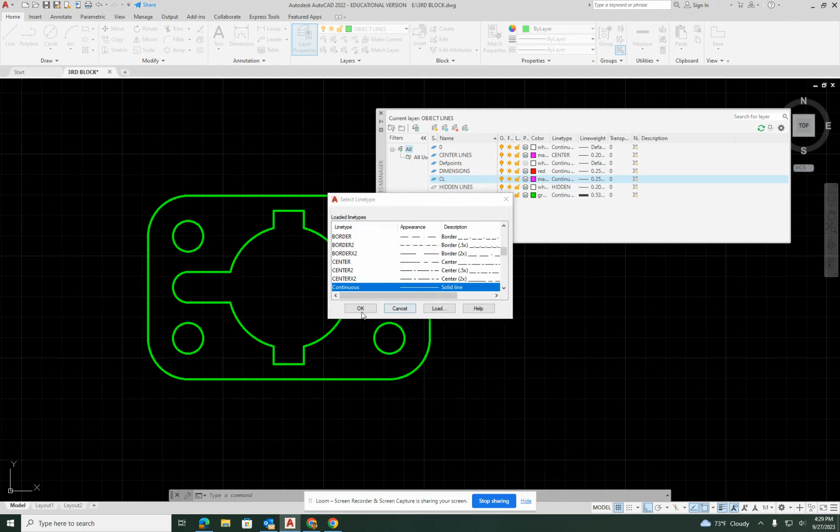And then for the line type, I'm going to load it. Since you don't have any on yours, you'll have to click on load, and then you'll scroll down to center. You'll hit OK. And since I already have one here, it's going to just ask me, do I want to reload it? But yours is not going to do that. And you'll hit OK. So you'll basically repeat those steps with the hidden and also with the object line. All right.

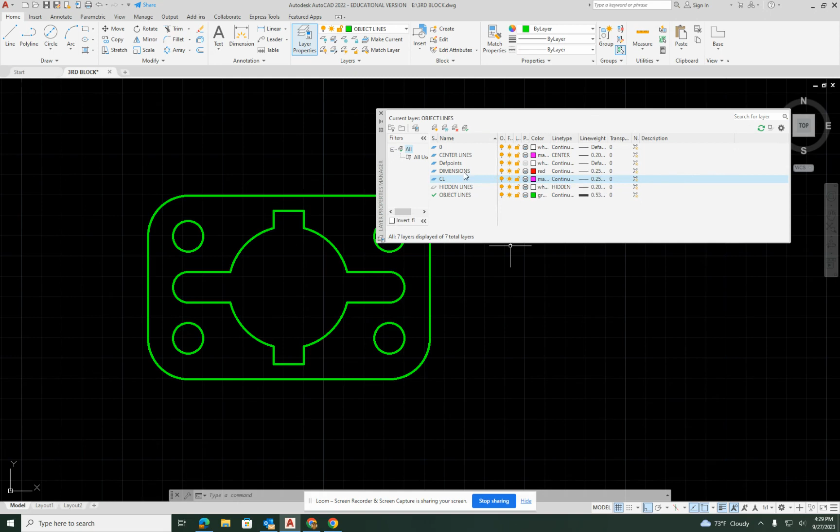So the object line, when you come over to this category here on the line weight, the object lines are 0.53, the hidden lines are 0.20, and the center lines are 0.25. So then that gives you everything. So once you set those, then you have the ability to go back and forth between them here. So every time you click on something here, your properties will change.

So all three of these should always say by layer: by layer for the color, by layer for the line type, and by layer for the line weight. So those three will always be associated with this. If you change one of these manually, let's say for instance you do this and then you keep doing stuff, it's going to stay on that until you change it back to by layer. So just always make sure that these three right here are associated with your layer, especially when it comes to the color. That's where a lot of the hang up is, that you get hung up on the colors, but then you forget to change anything back.

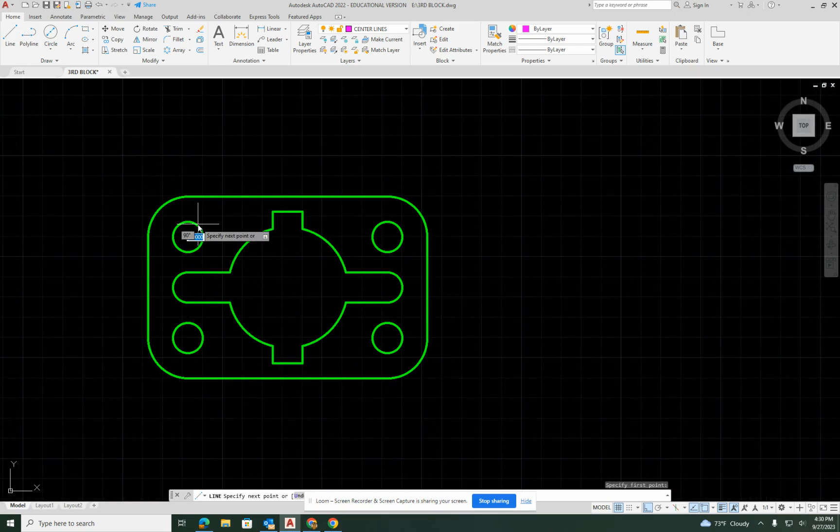All right, so I'm gonna do my center lines. And I'm gonna start with this one. And I'm just gonna kind of make it off to the side, like that. Then I'm gonna move it. So I'm gonna click on it, and then I'm gonna click on the center. Now, it is even on both sides.

So what I'm gonna do is actually build a mirror with it to get it going the other way, so it'll be the same. So I'm gonna click on mirror, select the object, hit the enter button, and I'm gonna pick the center. Now, I'm gonna turn my ortho off so I can see it rotating, and then I'm gonna hit the tab key and change that number that's in the right side to 45.

Now, don't trust that the machine is right on 45 because it'll round numbers up. It could be 44.50. So you want to make sure that you type it in manually. So you're going to type in 45, hit the enter button twice, and then it's going to stick.

Now, in most cases, your center lines are not going to show up too well. So what you have is what's called an LT scale to make sure they show up. So if you type in LTS, hit the enter button. Right now it's at 1. Let's go with 0.50 and see what it does. All right, so 0.50 looks like that's perfect. And it split the center line the way it's supposed to and put the plus right in the middle.

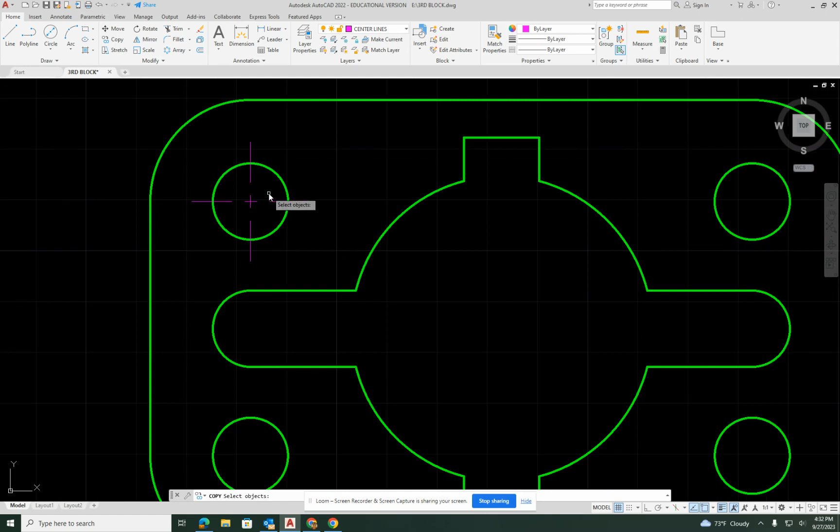So I'm not going to remake that all over again. I'm just going to copy it. And I'm going to copy it everywhere I need it. So I'm just going to hover around these center points until I got center points in the middle. And even the big one in the middle, I'm going to do that one also.

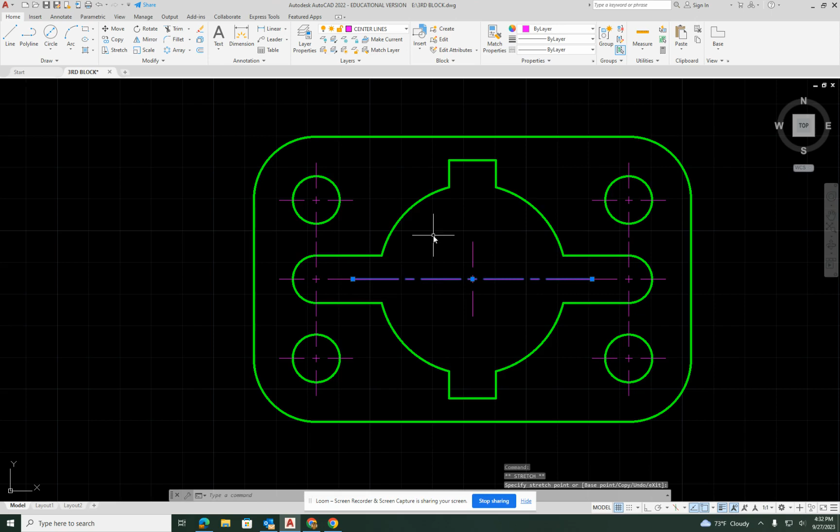Now, since that one is larger than the rest, what I'm going to do is just kind of take this and stretch it and touch the others. And the two that are purple here, I missed. I'm just going to take them and drag them up and down. Not all the way out the box.

And to make sure that it stays straight, you might want to turn your ortho back on, just to make sure it's not crooked. Okay, so that's all my center lines that I need. I'm going to switch over to my dimension layer. I purposely make mine red for a reason, because it stands out.

So for the dimensions, I'm going to do them pretty much like they are on the sheet, so I can find one. But I think that I did. I have to remember what I did, since I don't have a sheet over here. All right, so we'll just go for the gusto right here. I'm going to do a linear from this point to this one. So you always start with the interior dimensions first.

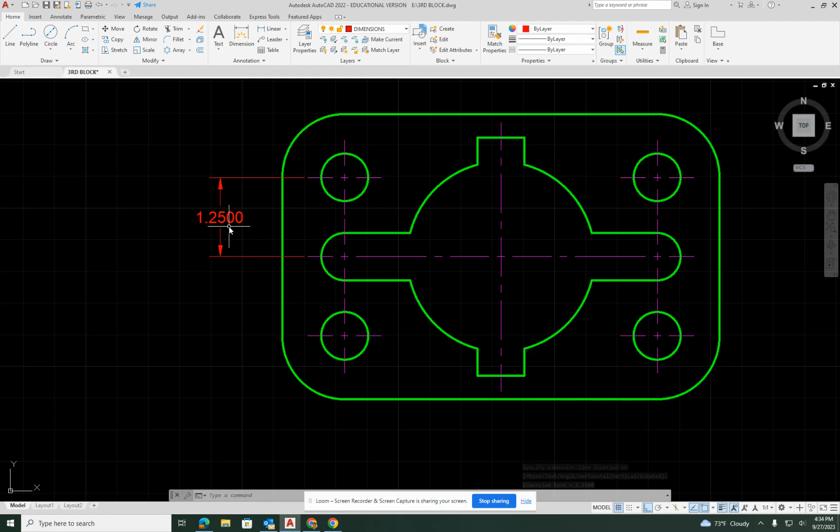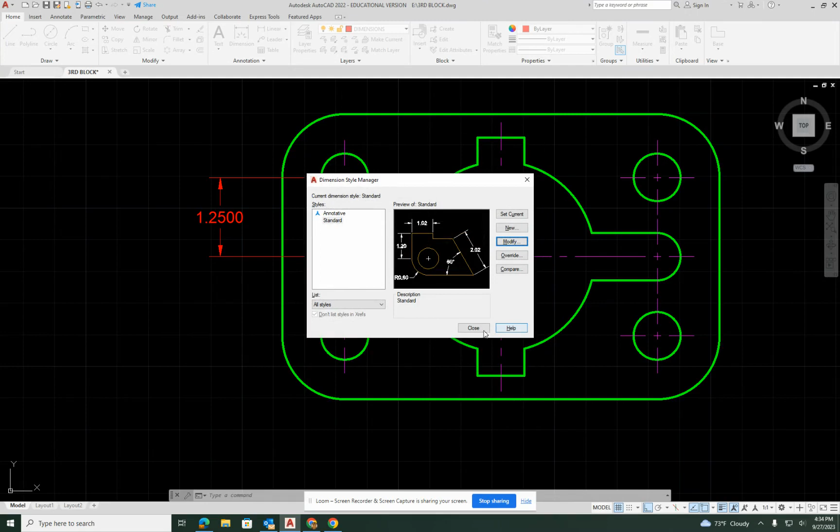All right, so you see that mine has 4 decimal places to it. We're going to change that. So we're going to type in dim style. And we're going to modify it. Now, the good thing is that once you make these setting changes, you don't have to go back and do it on every single assignment, because we're working on the same file. Once they're set, they're set. All right, and we're going to do set current. We're going to do close. It's going to change it.

So we're going to do that one. And we're going to do another one between these 2 points here. And we'll do the same thing across the bottom. So we're going to do one between this point. I'm going to drag this down. And we're going to do an overall between the 2 points.

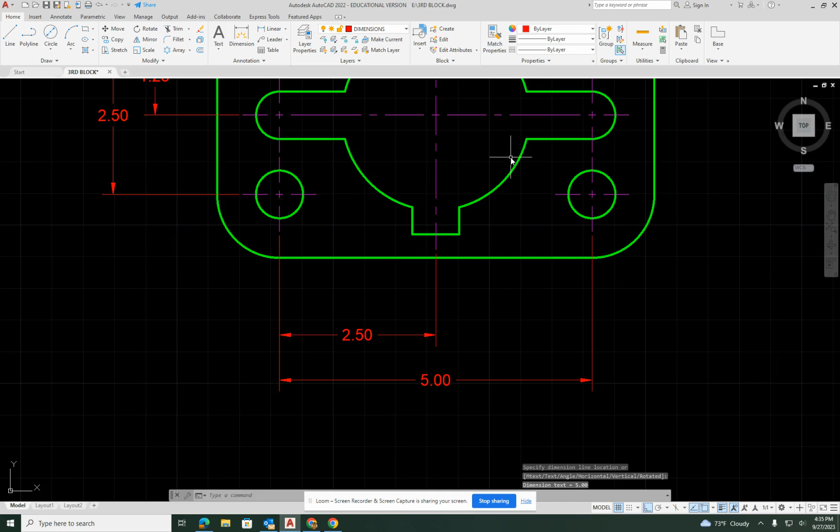So now, since we are, I'm going to pull that one out. I'm going to pull this one out. That's going to be another one that goes in the middle of that. That's why I'm pulling this one out so far. So this one is actually going to go between this point and right here.

Oh, you know what? We don't even need that. So we'll actually pull this in a little bit further, because we already got the same thing on the other side. So we don't need to repeat the same dimension twice. All right, but we will do the one from here to here, and we'll pull that one out.

And now from that, the only thing we really need are a couple diameter dimensions, which we'll do diameter for this hole here. And we're going to edit that dimension. So what you have to do is click behind the 5, hit the enter button, supposedly. Let me cancel that. There we go. And we're going to put 4 holes.

All right, then we're going to do this diameter. Now, it may not do diameter because it's only a curve. So what we're going to do is actually do a little trick with it. So we're going to do QL.

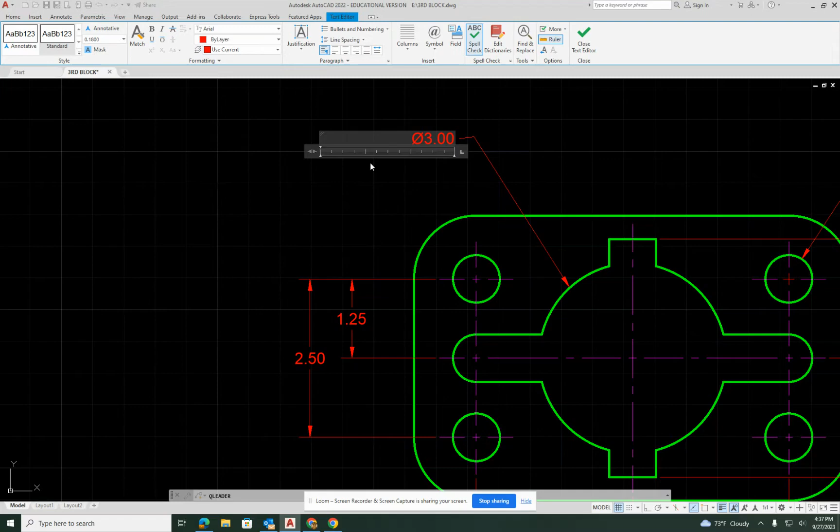So what we're gonna do is diameter 3. So we're gonna do 2% signs, lowercase c, 3.00, and then it's gonna give us a diameter for that. Otherwise, it's gonna do a radius if we did it the other way. So we're gonna straighten this out like so.

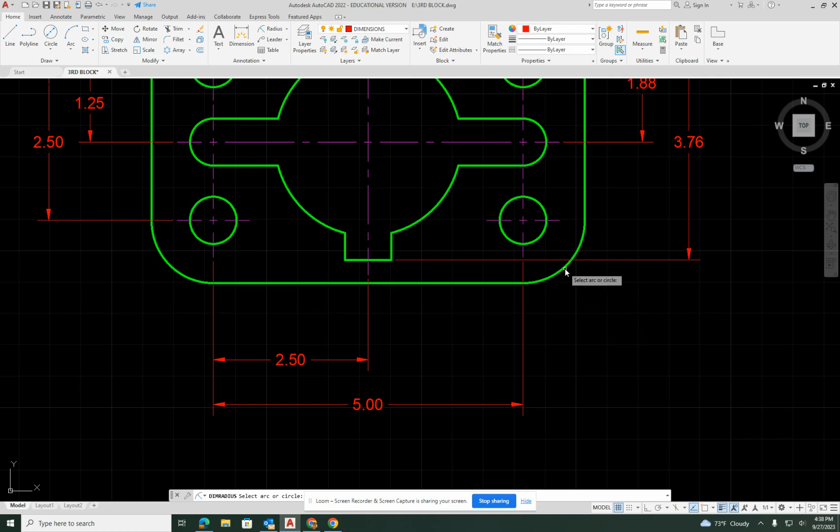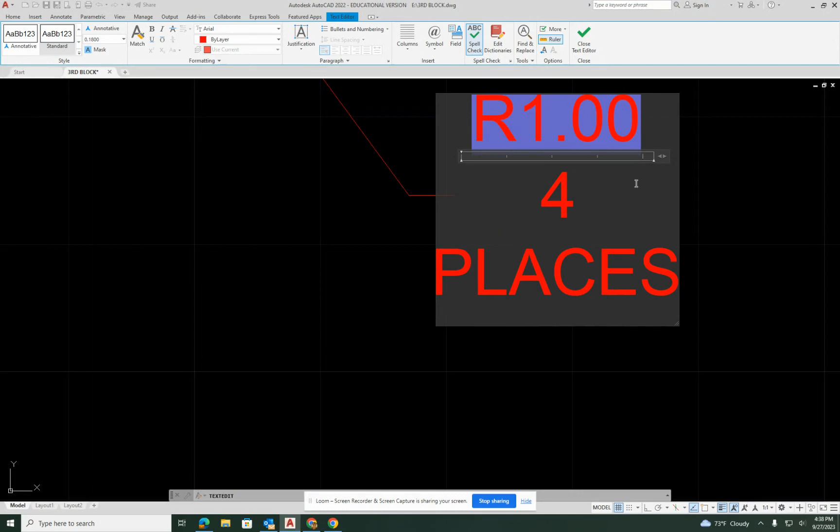All right, so I think the one thing that we do have left is, oh, we got our radius at the corners. So we're going to use a radius dimension for that. Oops, wrong one. And same thing. We'll double click. We'll go behind the number. We'll pull this out a little bit. Hit the enter button. So we'll just do 4 PL, 4 places.

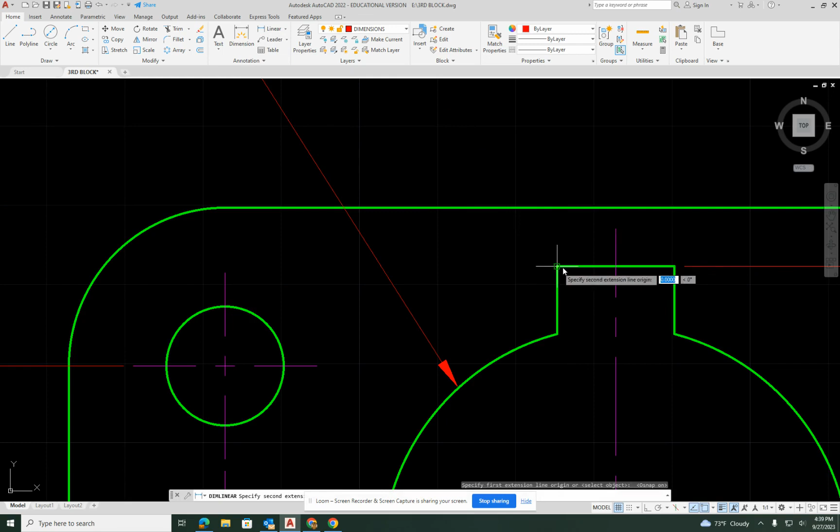And finally, we'll do our little key. And that'll be the last part of it. So we're going to do a linear. I'll turn this back on. We'll do 0.38 on that one. Then we'll do linear again. We'll do the 2 points here. So that'd be 0.75. We'll drag that up right there. So that's all the dimensions that you need.

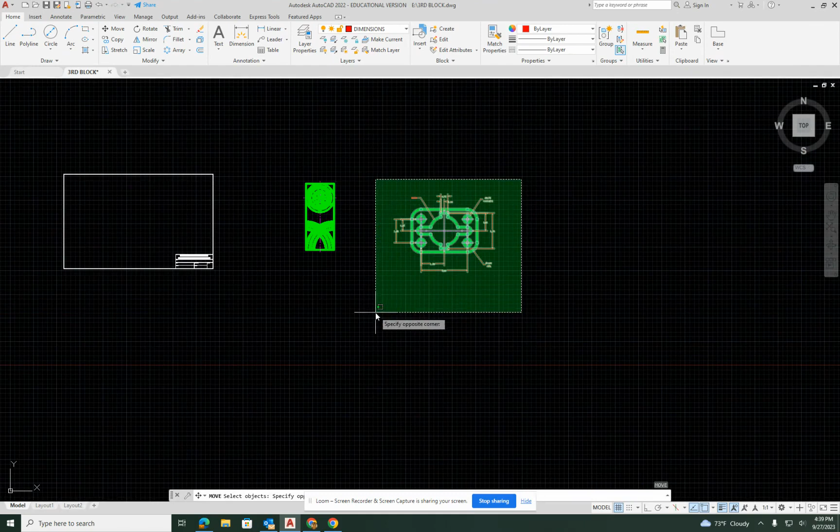All right, so now what you want to do is put a title block around this. Move this over here. Then I'm going to copy the title block and put it around the drawing. And we're going to try to center it. I kind of jump around. Sometimes it's good to move things when they're not touching anything else.

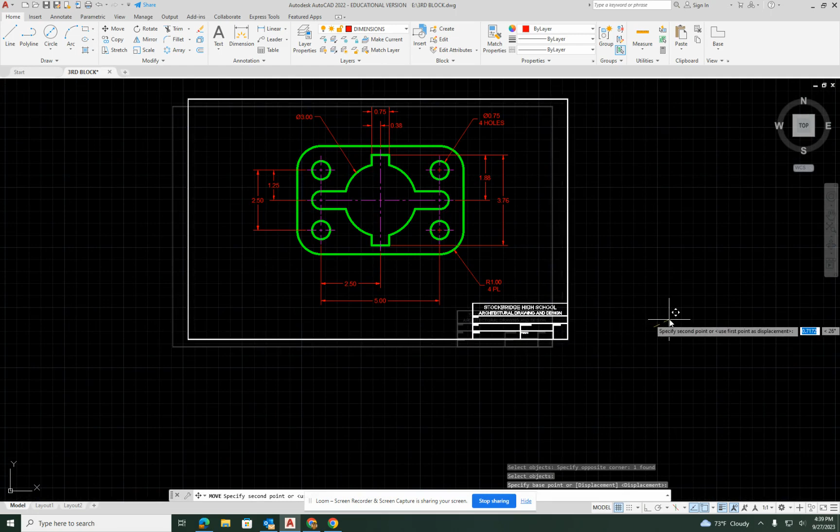All right, so now is our text. All right, so text, multi-line. We're going to go from top corner to bottom corner here. And I'm going to change my text height to 0.12. Then I'm going to choose the second, not the second, the third and the fifth button here. We'll just choose the third one, center. All right, so this is the key plate.

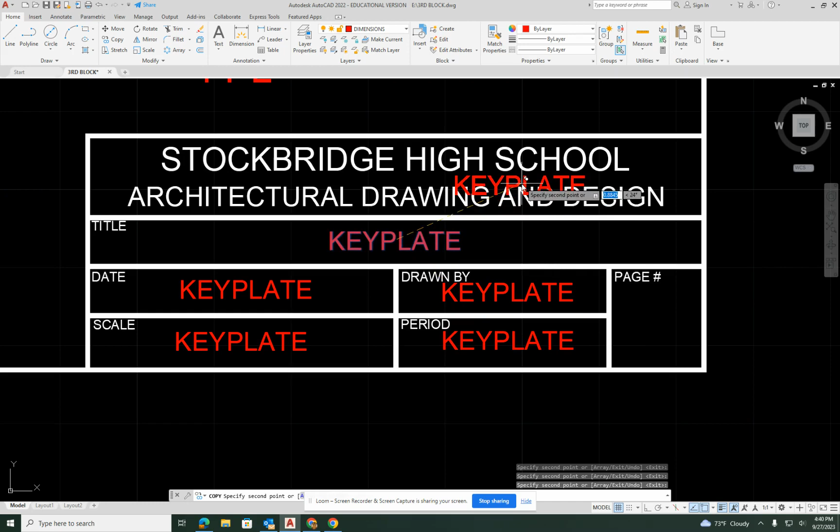We'll leave it at that, and we'll move it down a little bit because for some reason it seemed to be up high. And instead of doing that over again, we're just going to copy it. And I'm going to put it right in the center of every word that I need it because it's centered text. So for the date, whatever the date is, today is the 26th, I think, 27th. So 09/27/23.

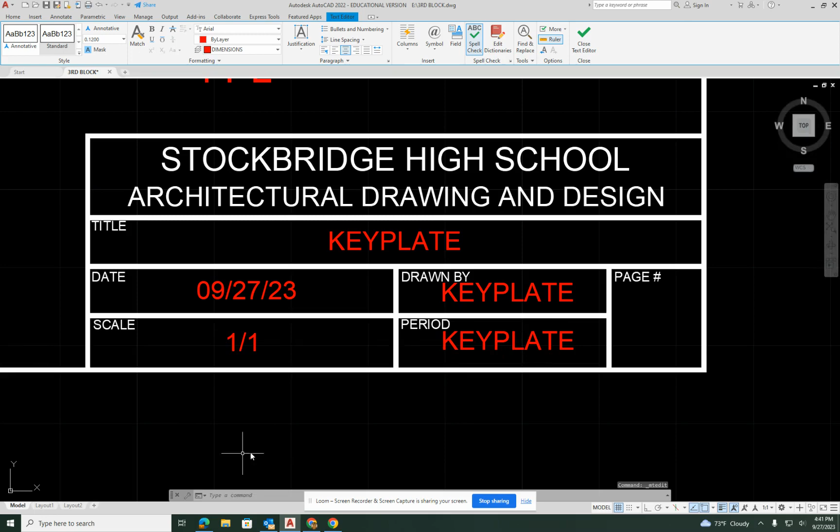Then I'm going to click off to the side, double click, scale 1/1, drawn by, you, and period. Third. And that's all the information. So next is just to export it as a PDF and then turn it in.

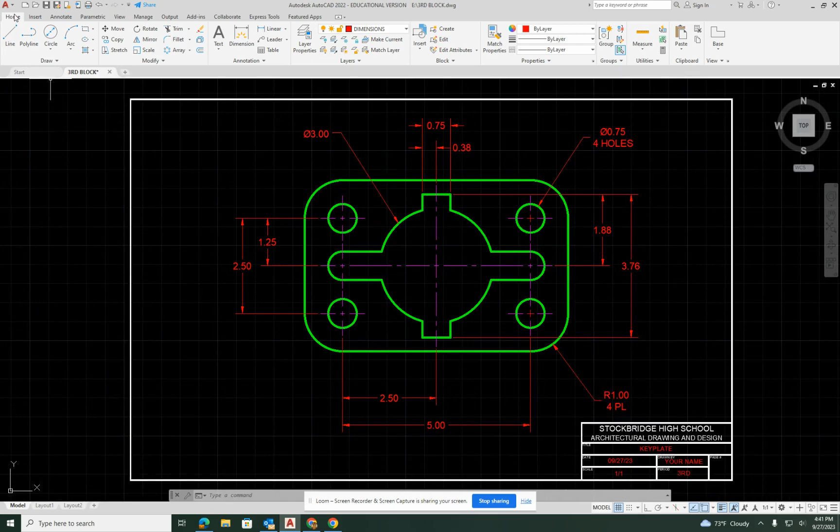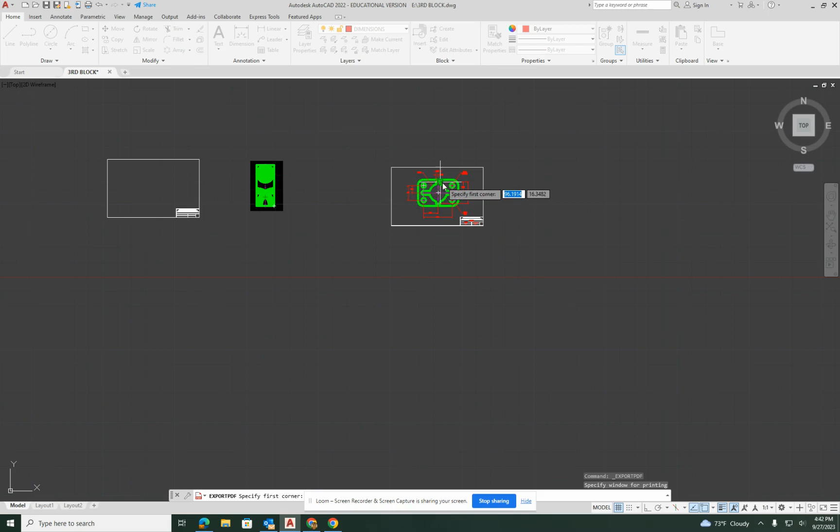All right, so we're going to go to here, export PDF. And if this says display, you would change it to window. And usually when you change it to window, it'll take you back out onto the screen. But if it doesn't, just click the little button next to it. It'll take you back onto the screen. And this is the last thing that we exported. So we need to reset the window. And sometimes you can be in a blank spot and not know it. So you have to make sure that you reset the window.

All right, so in this case, we're going to do Keyplate dash your name. And then we're going to do save. Once it blinks, that's it. And then you just turn it in and you'll be done with that one. So that's it for the key plate.